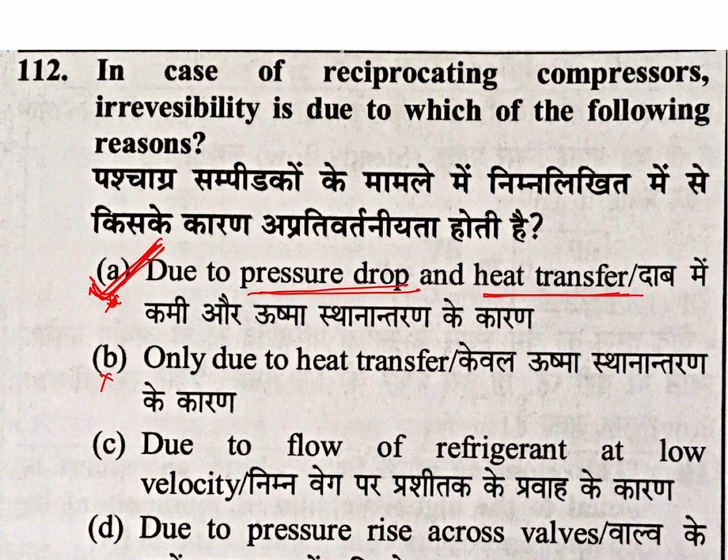So this one is possible. Question number A, possible. Because of friction you will get some pressure drop, and heat also, because of friction heat will generate. So A is the best option, because in any of the options the word friction is not available, so A is the answer. Due to friction irreversibility is there, and because of friction pressure drop occurs and heat transfer, heat also generates, and that heat generation is also internal heat generation.

The next question: if the Reynolds number in a pipe is less than dash, then the flow is said to be laminar. Direct question. Pipe flow, this is pipe flow, so pipe flow already discussed. Pipe flow and open channel flow.

In case of laminar, RE should be less than or equal to 2000. Reynolds number should be less than or equal to 2000, and in case of open channel flow for laminar case, Reynolds number should be less than or equal to 500.

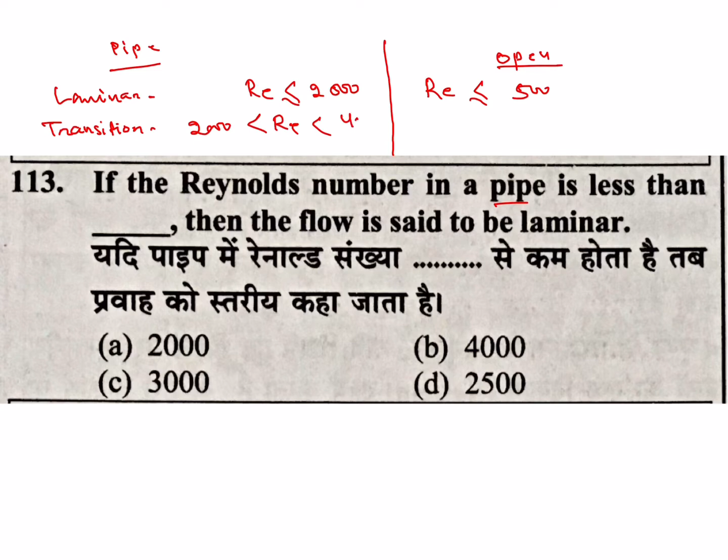Then transitional flow: Reynolds number should be greater than 2000 in case of pipe and less than 4000. In case of open channel flow, Reynolds number should be between 500 to 1000.

And for turbulent flow, Reynolds number should be greater than 4000. And in case of open channel flow, Reynolds number greater than 1000. Both are important, both you have to remember.

In this case, flow should be laminar. So pipe flow, laminar, Reynolds number should be less than or equal to 2000. A is your correct answer.

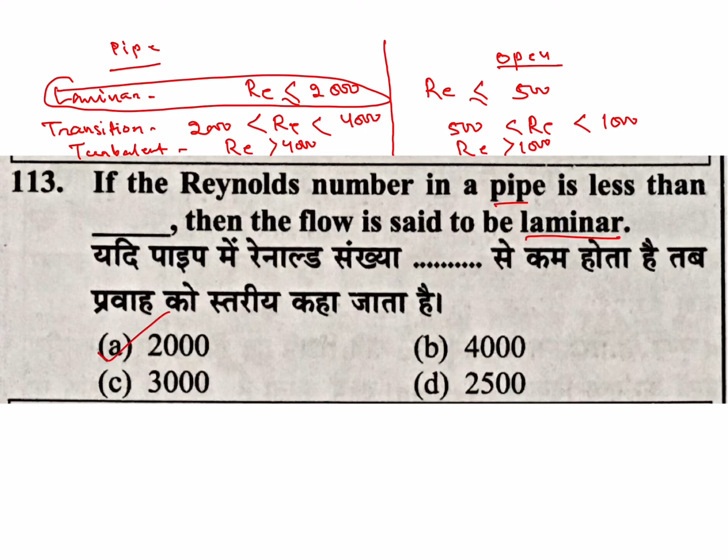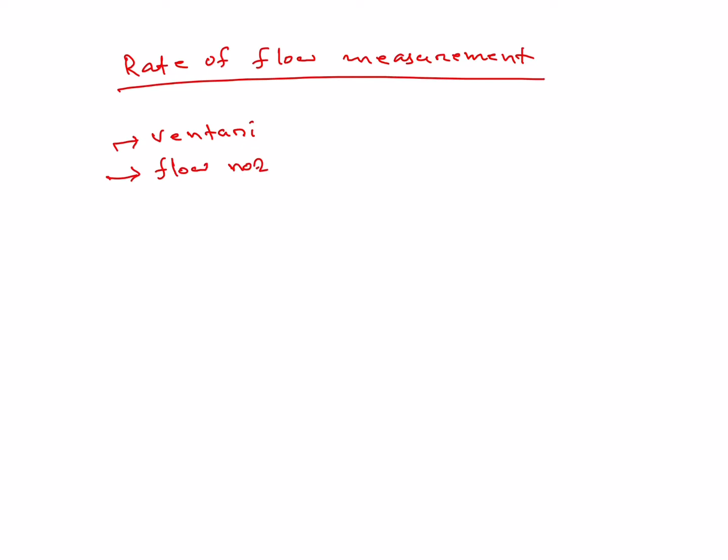A dash is a device used for measuring the rate of flow of a fluid flowing through a pipe. Rate of flow measurement. Devices are: venturimeter, then your flow nozzle, orifice meter, then bend meter, rotameter, pitot tube also you can measure, but directly in pitot tube...

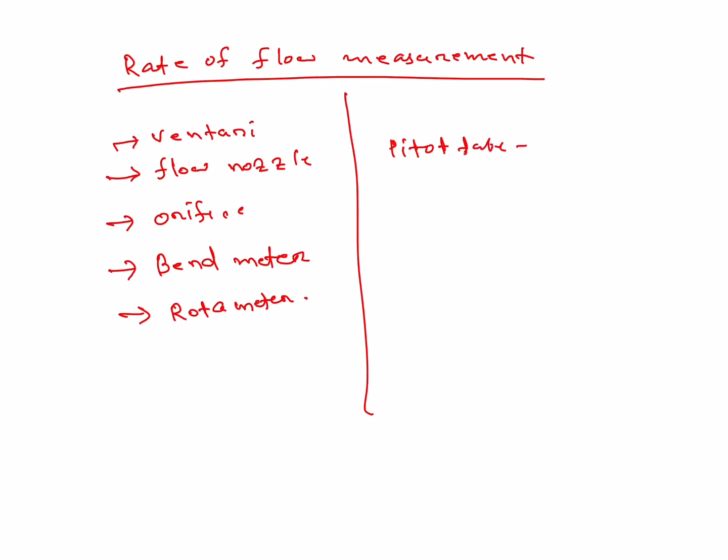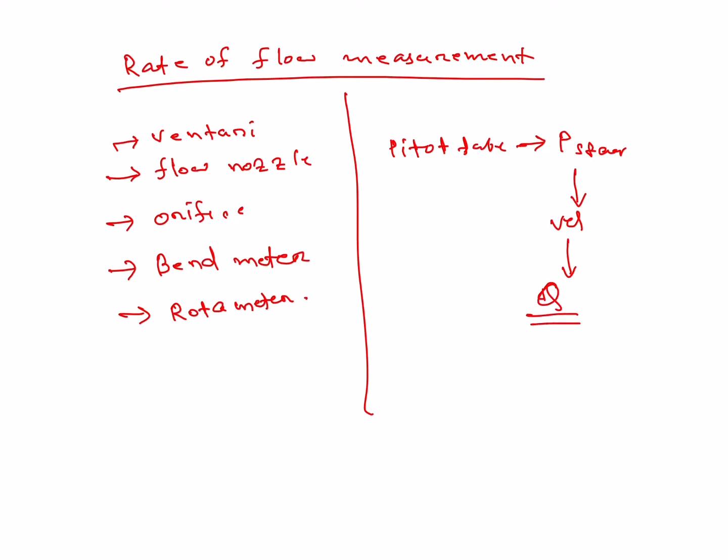...you will get your stagnation pressure, P stagnation. Then from P stagnation you can calculate velocity, and if area is known to you, then you can calculate rate of flow or discharge. So from options we will check. A dash is a device for measuring rate of flow: manometer, barometer, venturimeter. Yes, venturimeter is available, so venturimeter is the answer.

Q ideal in case of venturimeter: A1 A2 root over of 2GH divided by A1 square minus A2 square whole root over. H is your piezometric head difference, and H also you can calculate like this.

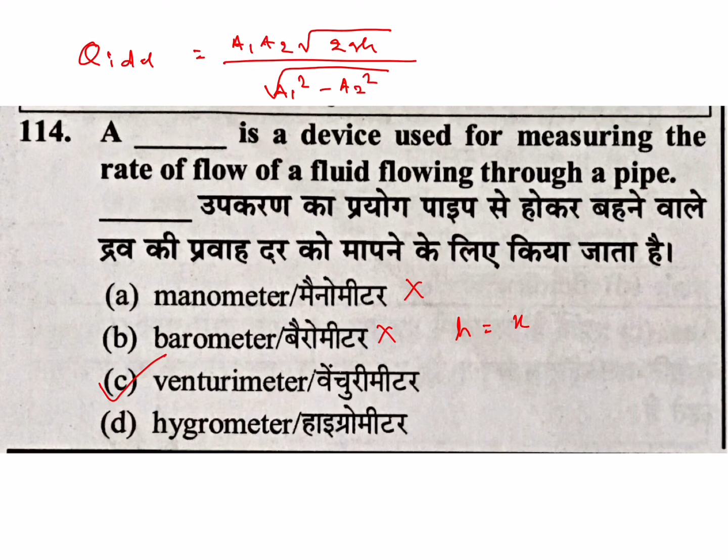X is the deflection or difference, manometric deflection. SM is the specific gravity of manometric fluid, and S is the specific gravity of flowing fluid, minus 1. This is the formula, this formula also important, they may ask. This formula is more important in case of SSC JE, and if they will ask a problem, but SSC JE they won't ask this type of problems.

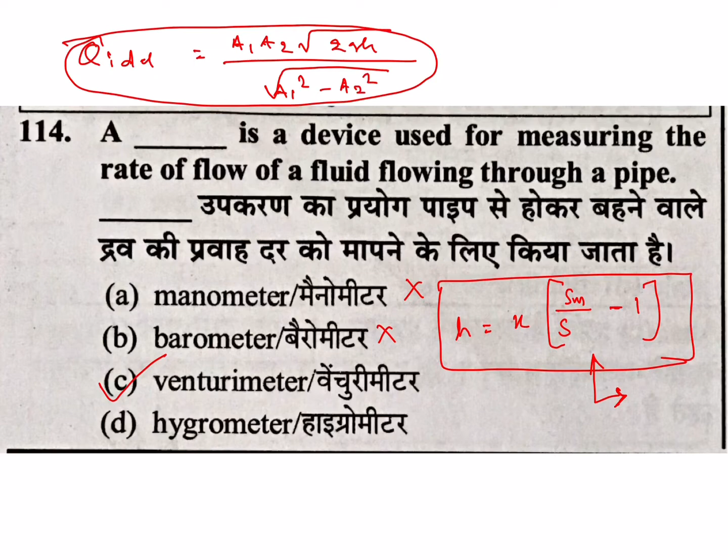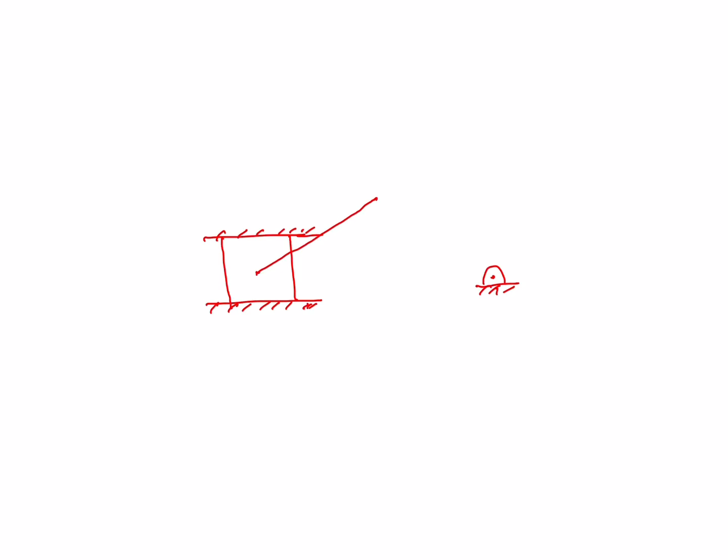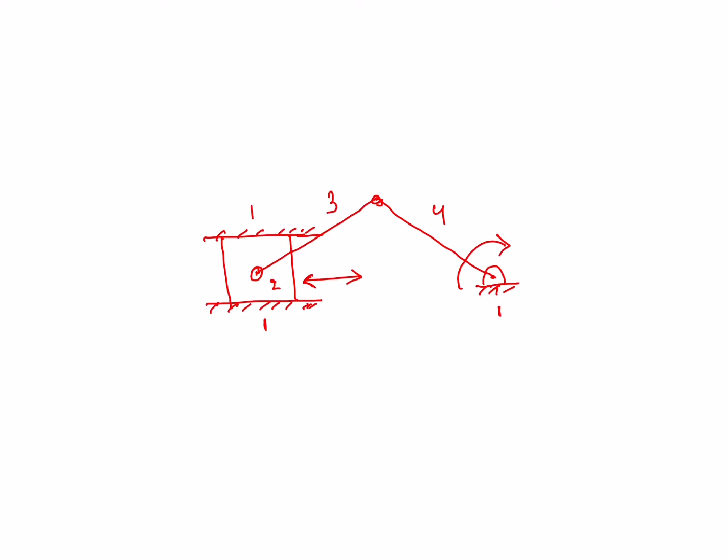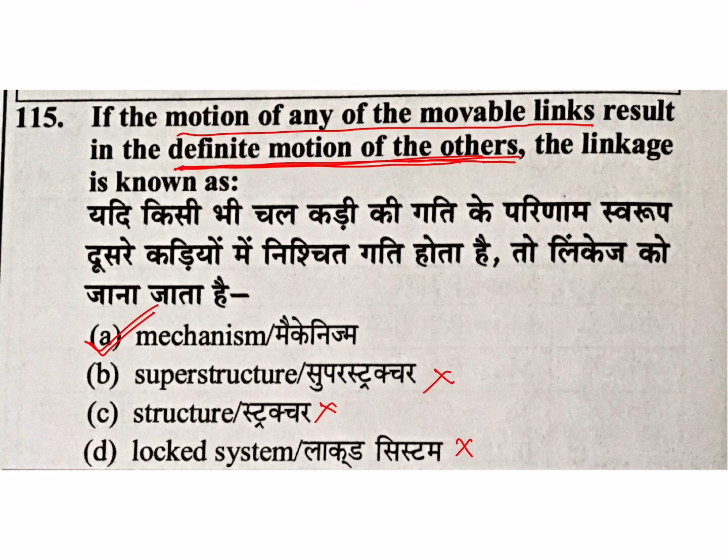Next question: if the motion of any of the movable links results in definite motion of the others, the linkage is known as. So it consists of many movable links and definite motion is present. Definite motion means it's a mechanism. In a structure you will not get motion, a locked system is also not possible, nor is a superstructure. Only option A is possible. Mechanism definition: if a number of bodies or links are assembled such that the motion of one link, when you constrain one link, gives definite motion to another link. Let's take an example: piston, four links. Link 1, link 2, link 3 and link 4. If link 2 reciprocates, then definitely link 4 will rotate. Motion of any of the movable links means if you give motion to link 2, you get a definite motion of link 4. This is the example of a slider crank mechanism.

The ratio of specific heat at constant pressure to the specific heat at constant volume for a monoatomic gas. You have to remember both monoatomic gas and diatomic gas. Specific heat at constant pressure, Cp, divided by specific heat at constant volume, Cv, equals gamma, or the adiabatic index. Gamma depends on the molecular structure of a gas, and Cp/Cv of an ideal gas depends only on gamma and the R value, independent of temperature and pressure. For monoatomic gas, gamma equals 5 by 3, or 1.6, and for diatomic gas, example air, it's 7 by 5, or 1.4. Both are important. So monoatomic gas is 1.6, D is your correct answer.

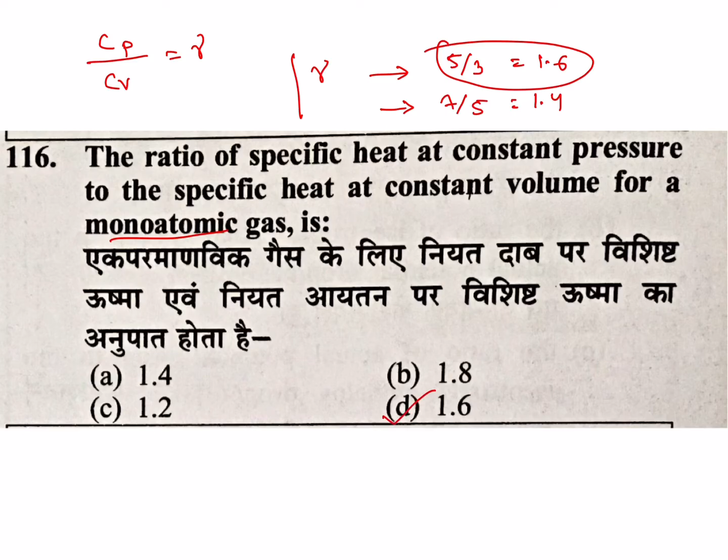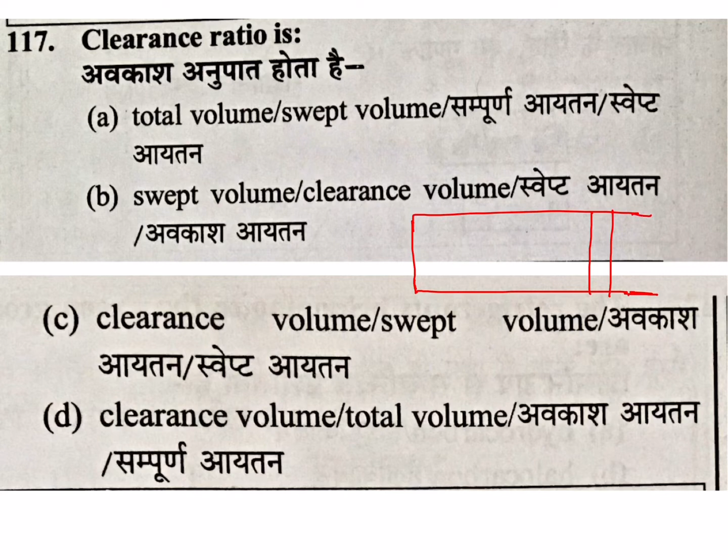Next question: clearance ratio. If we take a piston cylinder arrangement, this is the piston's maximum position. Then you get clearance volume VC, and stroke volume VS. Clearance ratio is the ratio of clearance volume divided by stroke volume. So from the options we check VC by VS, total volume, swept volume by clearance volume divided by swept volume. So C is your correct answer: VC by VS, clearance volume VC, swept volume VS.

Question: the Morse test is used to determine, in case of a multi-cylinder engine, we used to get the frictional power. So from the options, frictional power, D is the correct answer.

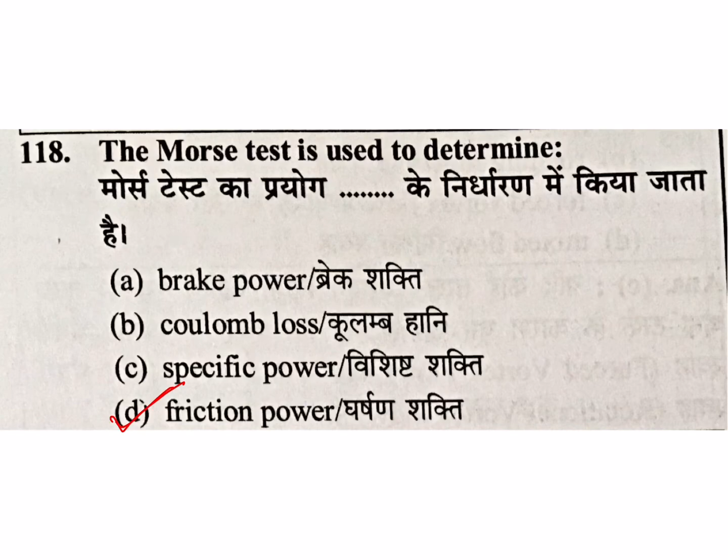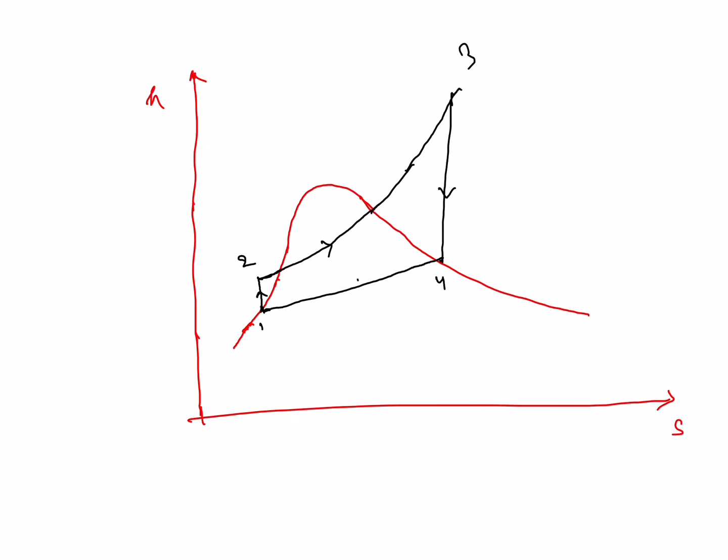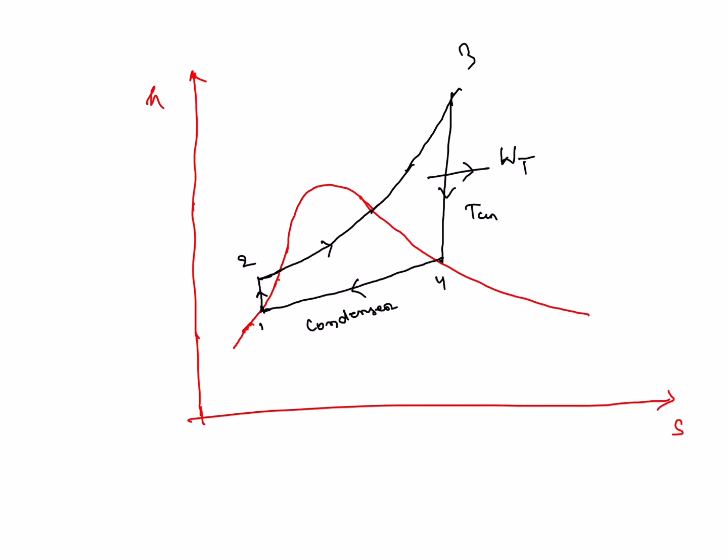Constant pressure line. One to two is pump, then two to three is boiler heat addition, three to four is turbine, four to one is condenser. Heat rejection happens in condenser, you get work in turbine, heat addition in boiler, or Q supplied, Q rejected in condenser. Then work is given to the system, pump work or WP. In this question they asked for turbine. WT or work of turbine is H3 minus H4.

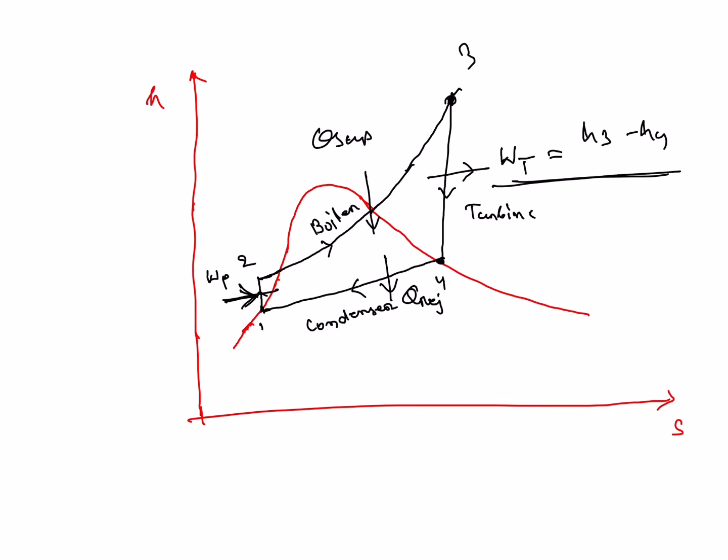Enthalpy at point 3 and enthalpy at point 4: H3 minus H4. H3 is the inlet turbine enthalpy, then H4 is the outlet turbine enthalpy. So turbine work is H3 minus H4. Reversible adiabatic expansion in steam turbine, or isentropic process: S3 equals S4, isentropic process.

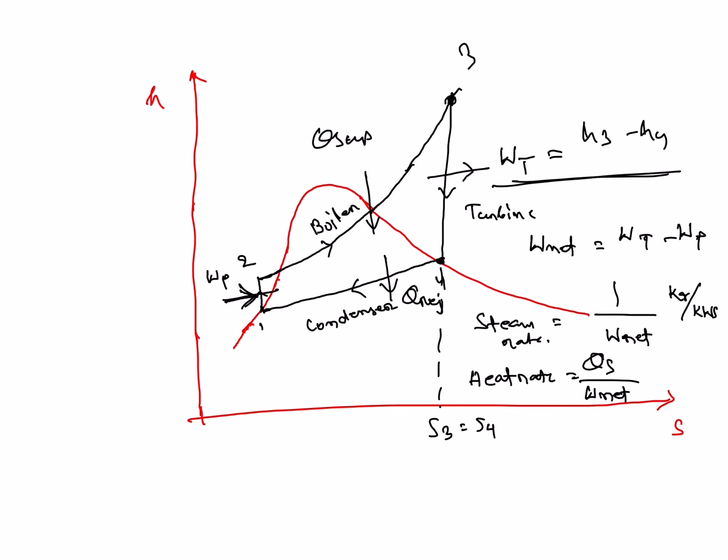This is also important: W net, how much you will get? Turbine work minus pump work. And steam rate, they may ask, is 1 by W net. Once in GATE also they asked this question. Include the unit also, you have to remember. This is steam rate, then heat rate: heat supplied by net work. QS in case of boiler, divided by net work done, or net work done you can write as turbine work minus pump work.

Rankine cycle efficiency is work done by heat supplied, or W net by heat supplied in boiler. Your answer is option A. Enthalpy change between inlet and outlet: H3 is your inlet enthalpy and H4 is outlet enthalpy.

This one: H3, H4, H3 minus H4.

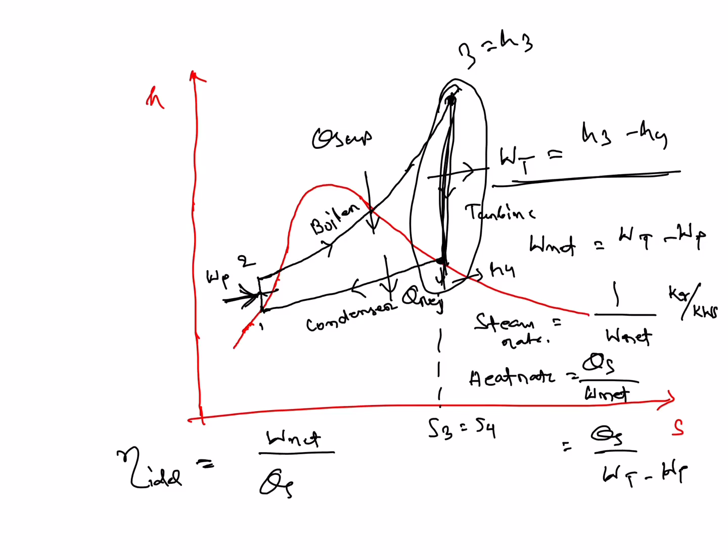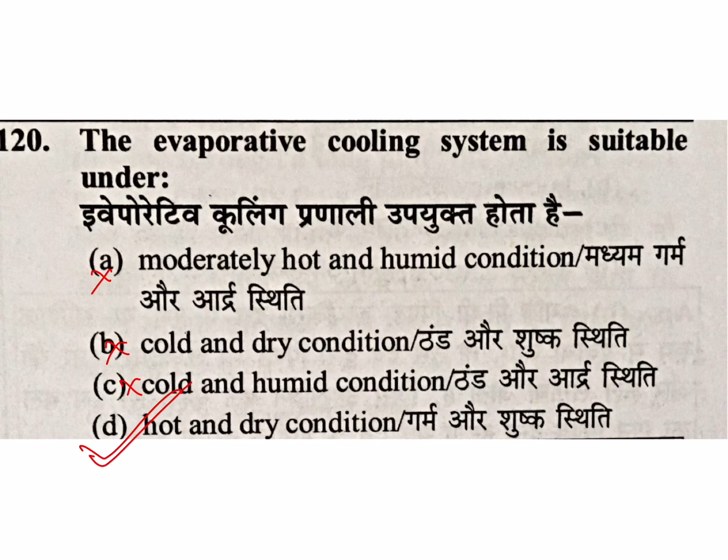Next question: the evaporative cooling system is suitable under which condition - moderately hot and humid, cold and dry, cold and humid, or hot and dry? D is your correct answer. Evaporative cooling is suitable in case of hot and dry conditions.

Next question: a graphical method of determining the normal, tangential and resultant stresses on an oblique plane. Mohr circle is your correct answer.

Tau xy, or your tangential stress, versus your normal stress. You will get principal stresses sigma 1 and sigma 2.

Then this coordinate is your normal stress sigma x and tangential stress tau xy.

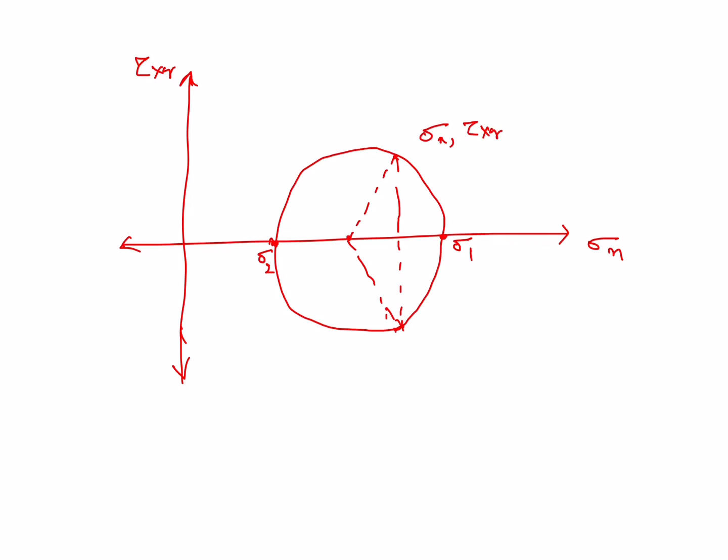This one is your center. So if you draw the Mohr circle, you will get tangential stress, normal stress, and your resultant stress.

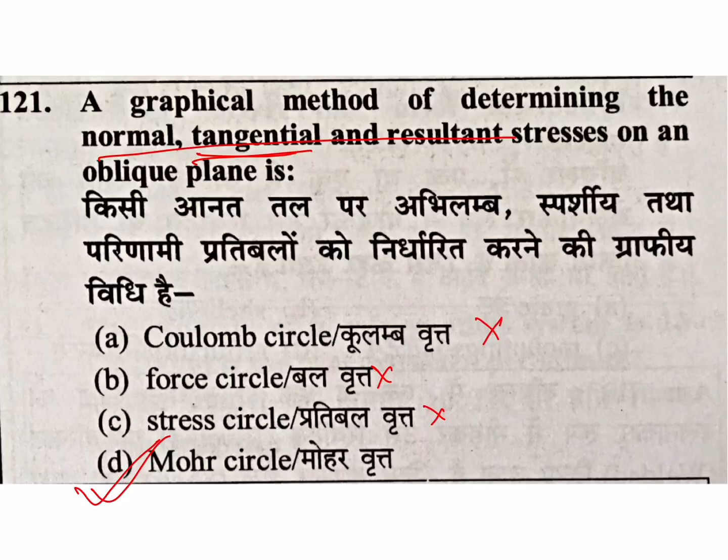Inside a fluid, so you will get...

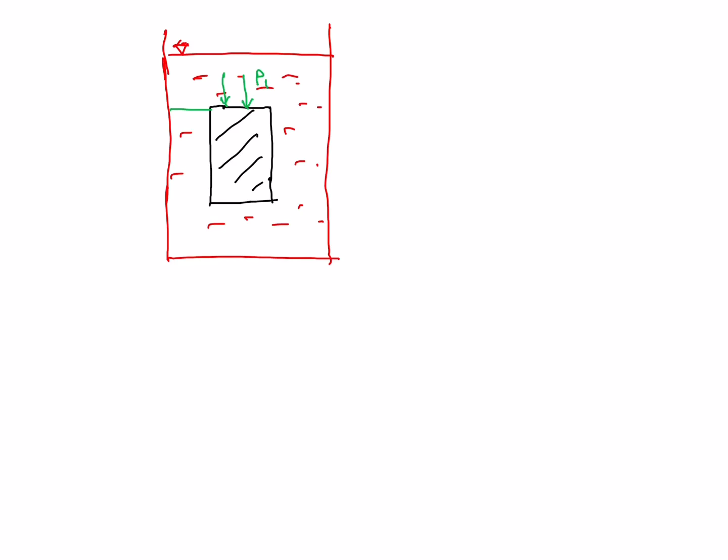If this distance is x, this distance is y, or your height of the body.

Bottom also you will get compressive force P2. P1 is rho G H. So P1 - rho G, density is same, the fluid density. Rho G H is your x.

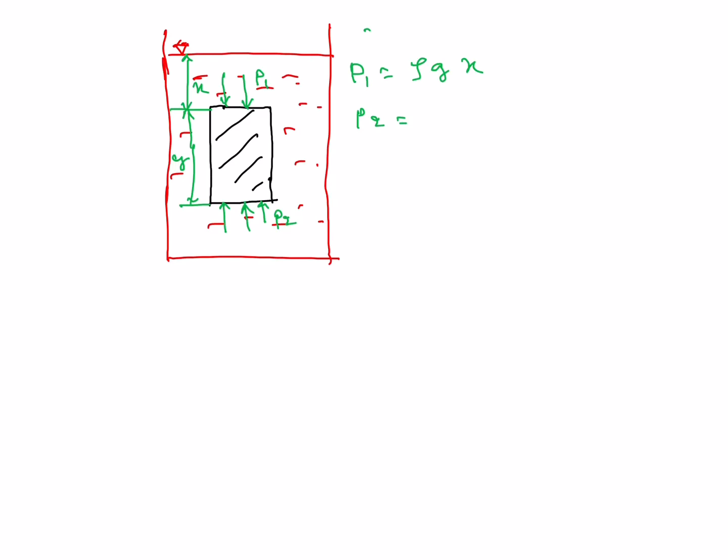P2 is rho G times x plus y. Height is x plus y, total height.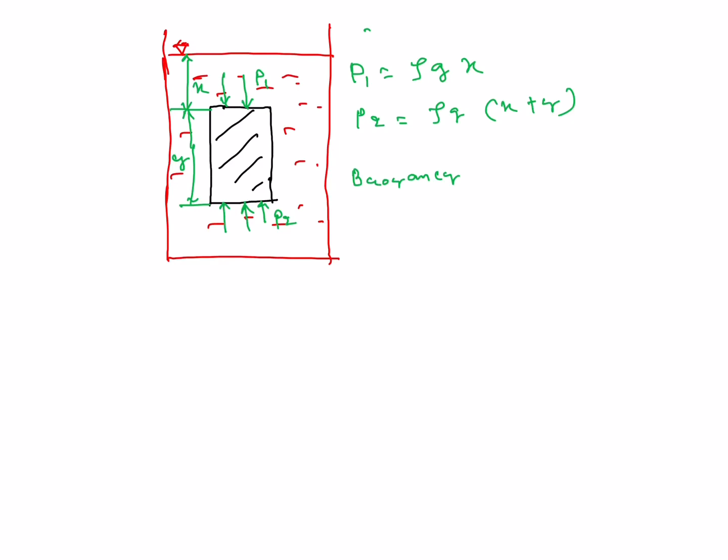So net hydrostatic force, or buoyancy, or net hydrostatic force here...

P2 times A, area, minus P1 times A, and it's upward. P2 minus P1 times A, upward.

Rho G times your height, y plus x minus x, times area, then you will get rho G.

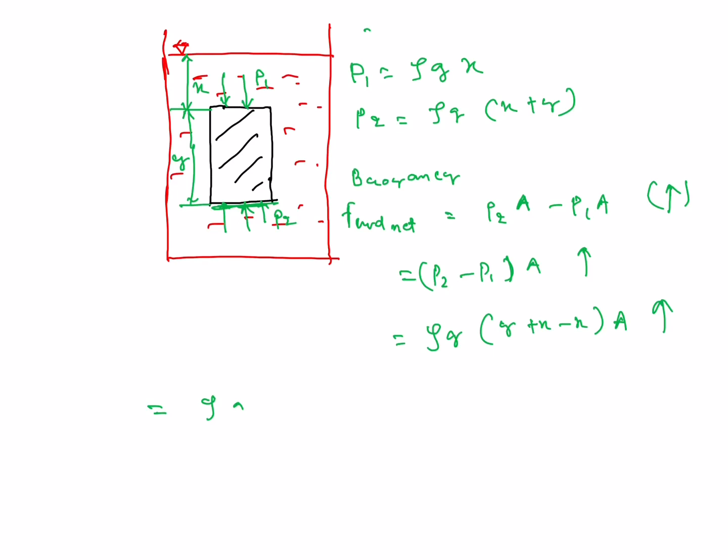Y into A - y, then area of cross section A.

So height into area of cross section is your volume of fluid displaced. We'll write volume of fluid displaced - rho G into volume of fluid displaced, and this is upward.

This is equal to a force of buoyancy, upward force. So from the option, the upward force equals the weight of fluid displaced.

Upward force is equal to volume of fluid displaced into rho G. This is your weight.

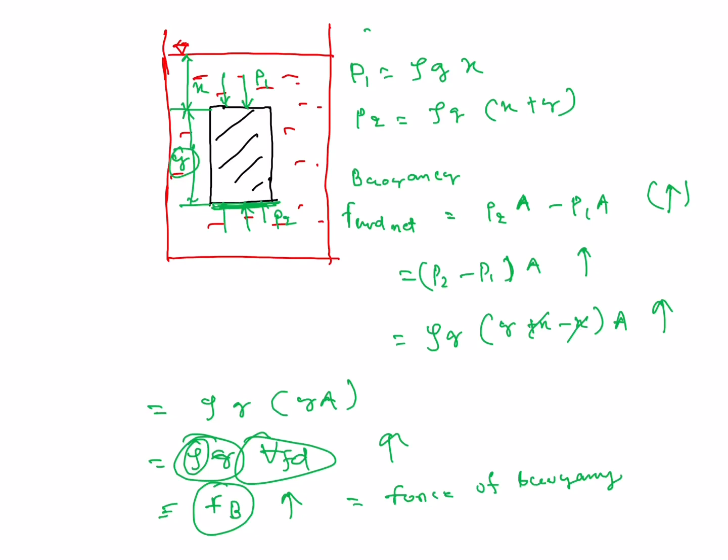Weight - this density is not the density of the body, this is density of fluid, rho. B is your correct answer, buoyancy.

Next question: in a boiler, one or more plates are bent into cylindrical form and riveted or welded together. This is called as - grate is the cast iron structure.

Shell mounting - not possible. Refractory also not possible. Shell is the correct answer.

That in case of small boilers, like a rice mill or sugar mill, you can also take the drum as a shell. Drum shape is like this.

Here you will get welding, and here in this area also you will get welding - weld area, in case of a drum.

First you have to bend it in a press, then you have to weld 3 parts. This one also you have to split - 1, 2, 3, 4 - meaning it will come like this.

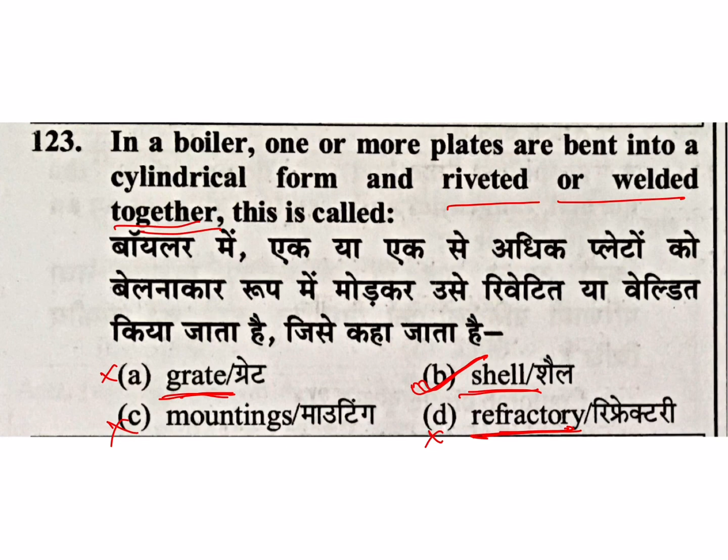But in case of drums, riveting is not possible - welding you have to do. And for this drum, the best welding method is submerged arc welding.